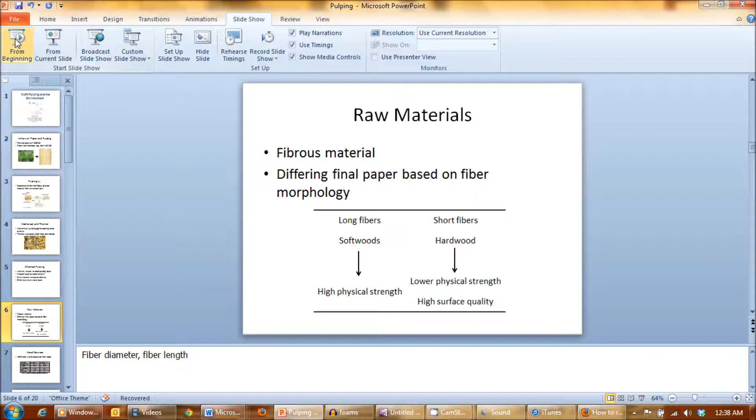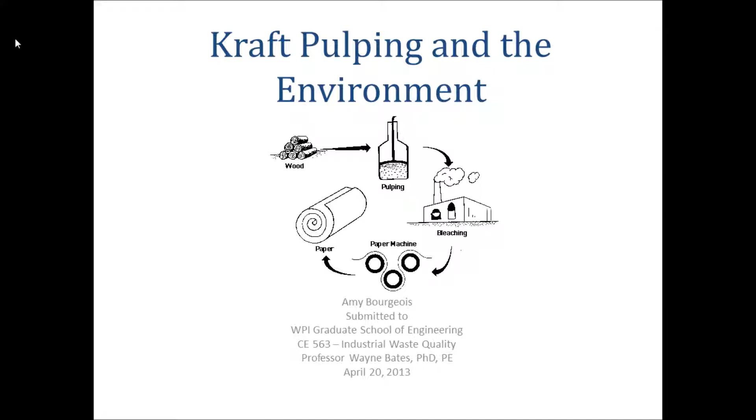My project was on kraft pulping and the environment. Kraft pulping is one form of chemical pulping for the paper industry, and this graphic shows wood going into pulping and then paper manufacturing. Paper has been used since 3000 BC. It was originally made by pressing papyrus to form thin sheets.

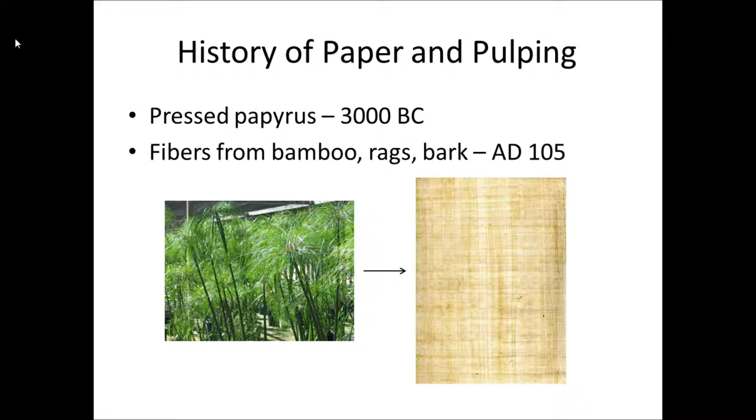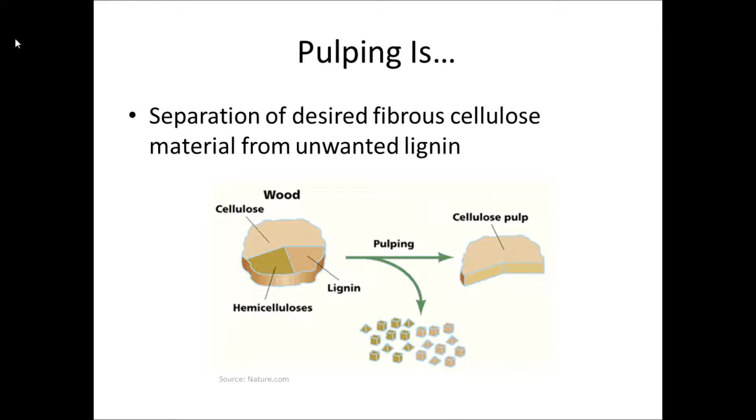After that, fibers from bamboo, rags, bark, or other materials were soaked in calcium hydroxide solution to form a pulp and then dried into sheets. Pulping is the separation of the desired fibrous material, which is the cellulose in wood, and separating out the unwanted lignin. It's also sometimes called delignification, and different raw materials have different amounts of lignin and cellulose.

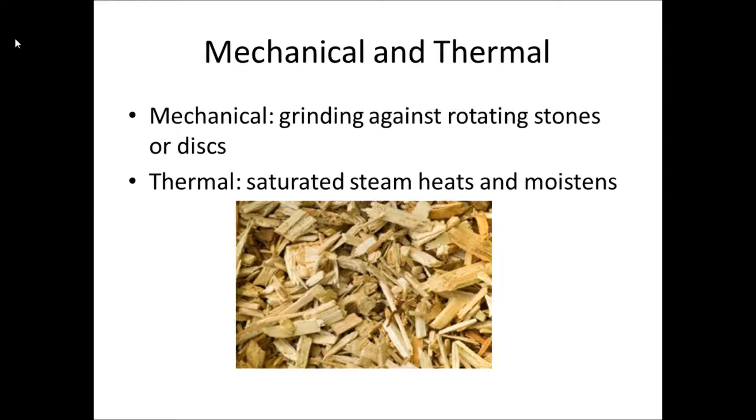Mechanical pulping is the method of grinding wood chips into smaller particles, which are then suspended in a liquid solution to make the pulp. Thermal uses saturated steam to heat and moisten the wood and remove the lignin. Chemical pulping involves solubilizing lignin in an alkaline, neutral, or acidic water-based pulping liquor, which may have chemicals such as sodium hydroxide or sulfite ions added to increase that solubility.

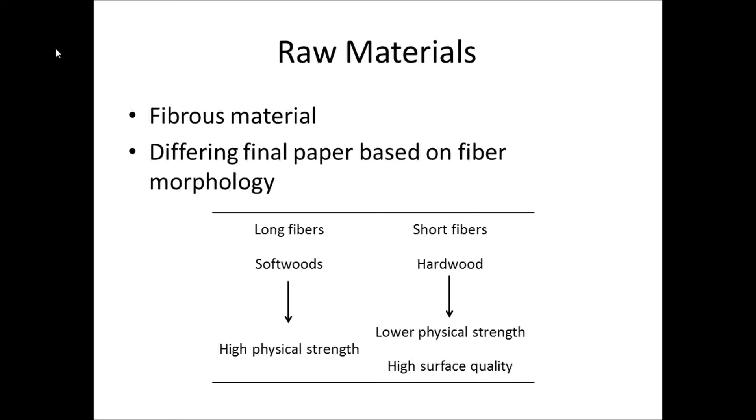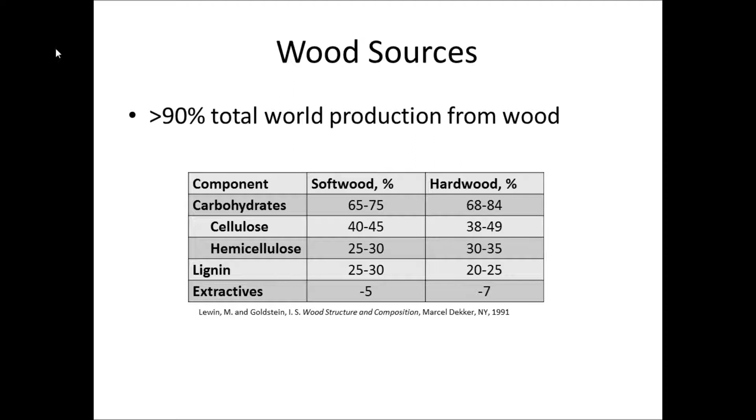Different raw materials that are used to produce pulp can produce different quality pulp and then different quality paper once it's dried. Materials with longer fibers give higher physical strength paper. Shorter fibers give lower strength but higher surface quality. Wood is the major source of the world's paper production, over 90%. These can be either hardwoods or softwoods, and these vary in the different lignin and cellulose concentrations. As we said before, softwoods tend to give the higher quality, stronger papers.

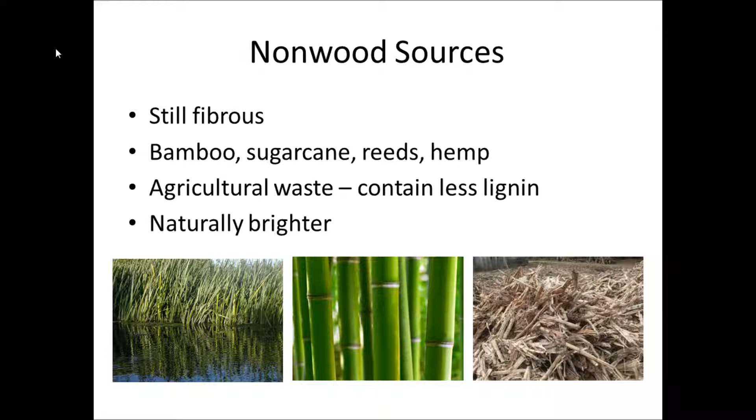Non-wood sources include bamboo, sugarcane, reeds, hemp, or some agricultural waste. These have to still have that fibrous material that can give strength and structure to the paper. Often these are naturally brighter, so they don't require as much bleaching.

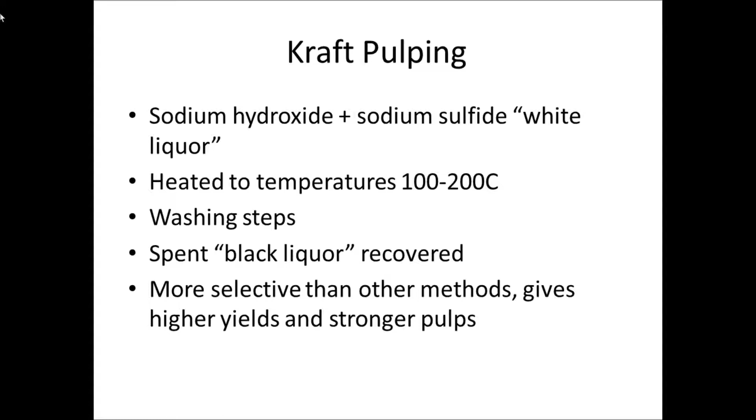Kraft pulping is the most heavily used pulping method worldwide. It uses a sodium hydroxide and sodium sulfide solution at high temperatures to dissolve the lignin. It's more selective than other methods, meaning that it retains more of the carbohydrates intact, leading to higher yields and stronger pulps. Here's a process flow diagram of the kraft pulping system.

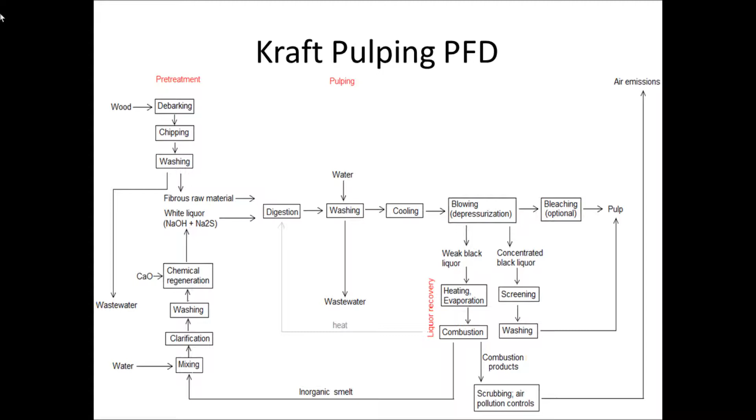On the left, you see all the pretreatment steps, and then the chips go through digestion and liquor, depressurization after rinsing, and then any optional bleaching. The spent black liquor from this process is then concentrated at high temperatures and then combusted. The inorganics that remain after that are dissolved in water to form a green liquor, which is then treated to produce a new white liquor, which can then be recycled as the starting material for this process.

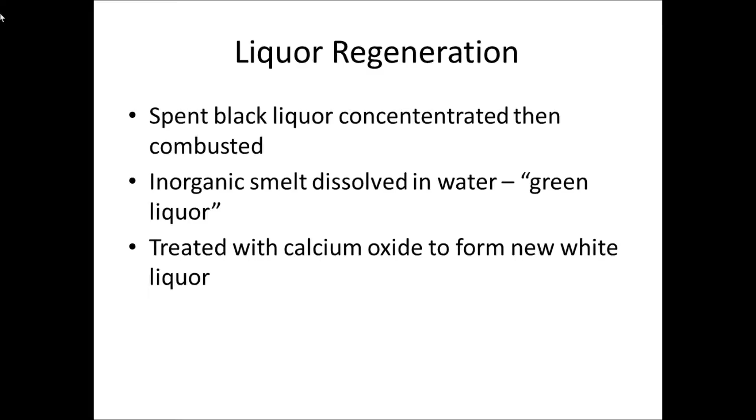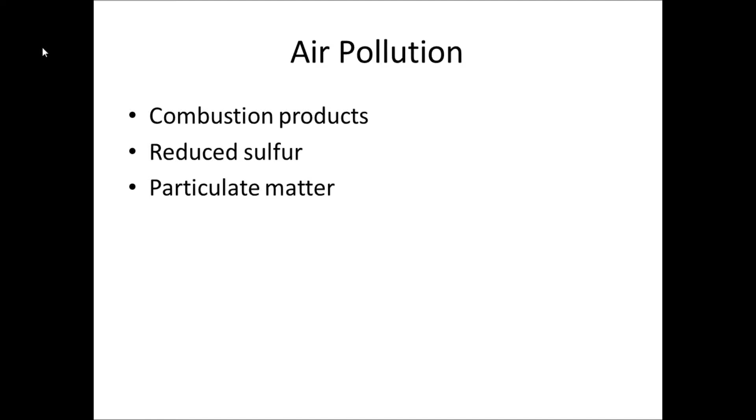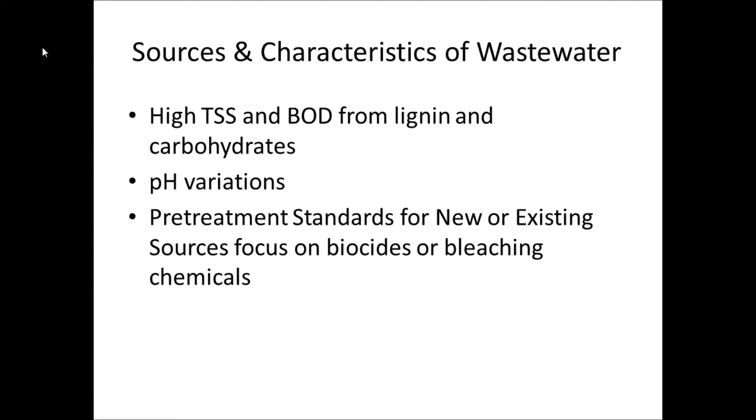There's a lot of combustion products that are formed during the liquor regeneration process: particulate matter, any sulfur oxides or nitrous oxides, and their discharge has to be limited. There's also reduced sulfur compounds that contribute to odor concerns. Wastewater from kraft plants typically has high solids and oxygen demands because of all the organics that were dissolved in solution. pH can also vary. The pretreatment standards that are set by the EPA focus on biocides that are used or chlorine-containing bleaching chemicals.

Organosolv pulping, which uses alcohols, acids, or other organic solvents rather than the white liquor solution, does incur higher solvent costs, but these can be offset by lower capital investment costs and higher yields if these are pretreated with a fungi that can attack lignin selectively.

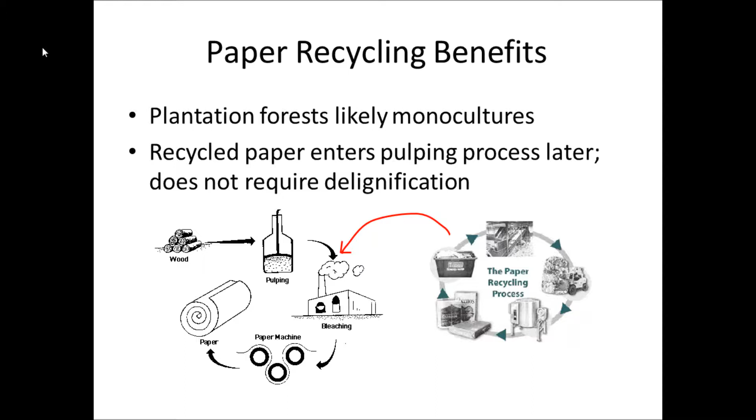Paper recycling benefits manufacturers since paper that's recovered can be entered into the manufacturing process at a later stage. It doesn't have to go through all the delignification. Plantation forests, which can be more susceptible to pest invasion, can also be reduced. The American Forest and Paper Association estimates that in 2011, 67% of all U.S. paper was recovered for recycling, and this can lower the demands on traditional forests as population and paper demands increase.

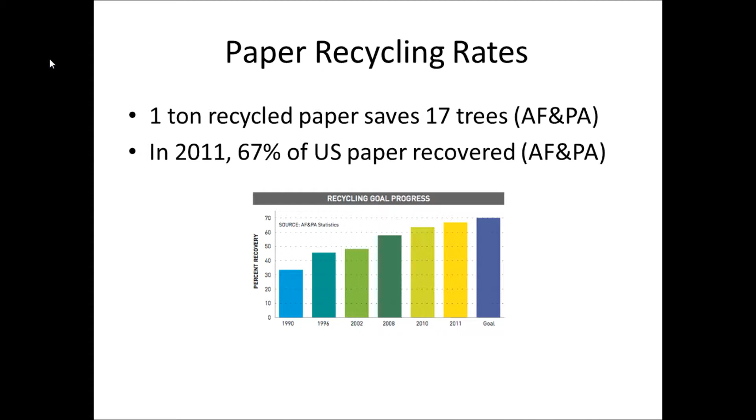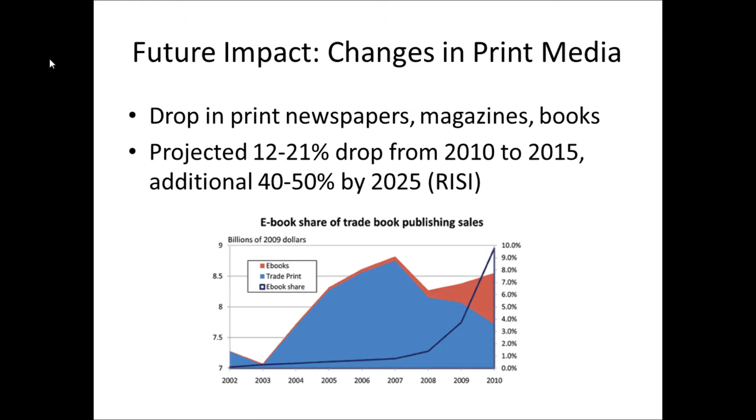Changes in print media, newspapers, magazines, and books. There's been a drop-off in the recent past and projected to increase in the future. The demand for print quality paper has been decreasing. In the future, if different qualities of papers are required, such as print media dropping off and that shift towards maybe packaging materials, different types of feed material can be used since fiber content, fiber diameter, and lignin content change the quality of paper.

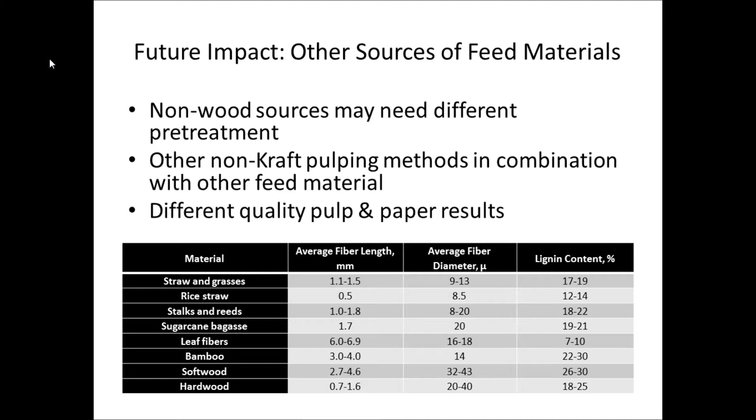The company ArborGen has an R&D project for freeze-tolerant eucalyptus trees, which is currently under review by the Department of Agriculture. These are the fastest-growing hardwood trees, and they are adaptable in colder climates, so they can produce larger amounts of pulp for paper specifically.

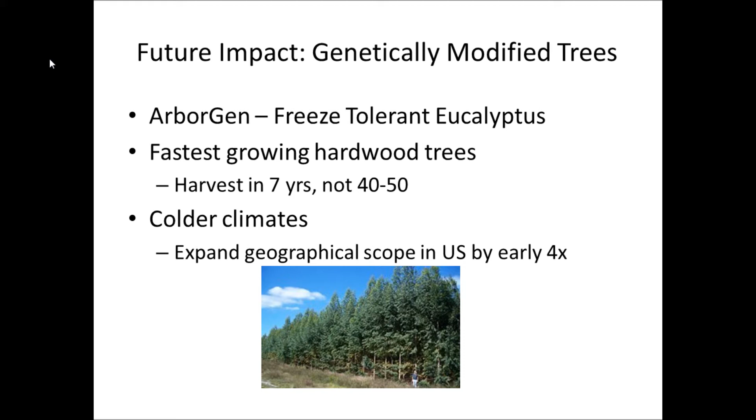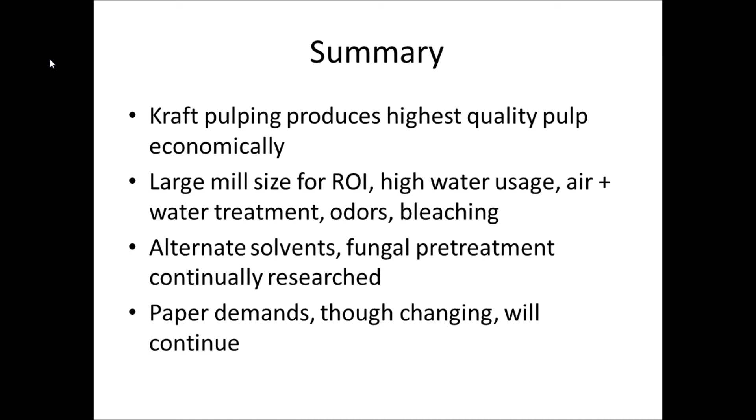Kraft pulping has historically been the most widely used pulping method because it does produce the strongest pulp. These require large mill sizes for return on investment, high water usage, and air and water pollution in the treatment. Alternative solvents and fungal pretreatment present attractive new options in addition to non-wood sources in the future.